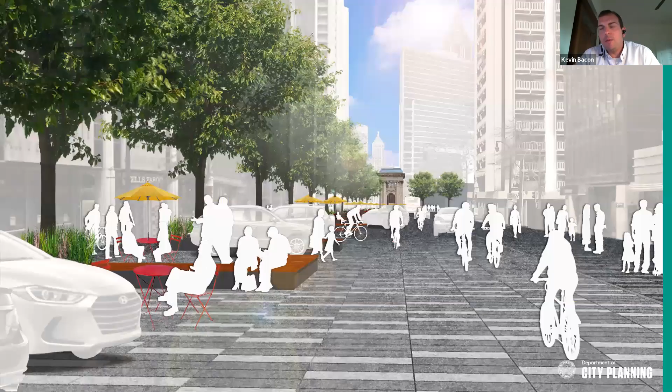Not just to single Peachtree out, but if we can get it right for Peachtree in terms of how we think about our public spaces, setting the tone for our public spaces throughout downtown and the rest of the city. So what you're seeing here is the culmination of the studio's work many years ago.

We first unveiled it at Atlanta Streets Alive in 2018, and had a couple of other different meetings and conversations to start sharing the idea. This really was just a 'what if.' We looked at the right of way of the street, and we looked at other cities that were doing interesting things.

Some of the things we heard, and still continue to hear, is that people think Peachtree Street should just be cut down or shut down to cars completely, that cars should not be in the space and it should be pedestrians and bicycles only. We hear that about a lot of our streets, and if you start to do that to all of our streets, we create a whole other situation of traffic challenges and public life challenges.

So one of the things we wanted to ask is: is there a better public space design that cars can inhabit, but where the balance, the majority of the space, is shifted toward how we accommodate and make space for people—bikes and pedestrians—but really that life you want to see on the street every day.

So we started looking at shared streets and shared spaces, looking at examples. We talked about Bell Street when we did our virtual tour in January. We've liked Exhibition Road in London a lot, and several others, and they're all just a little bit different. But the idea is that you remove the limitations between users and reinforce space and where things happen by the design of it, rather than striping and signage—again, carving out as much of that place for people. So it was a very informal start to the process, talking to developers, people on the street, and using that to paint a picture of what could be.

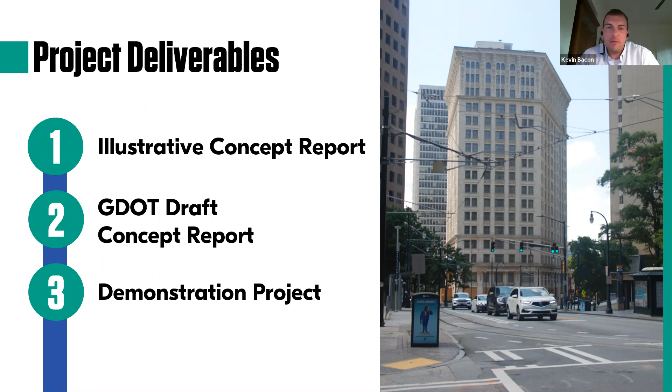We want to hear from people throughout that process. So we'll talk mostly tonight about what that demonstration project is.

This is really coming at the end of our scope of work with Toole. You can see we've been doing existing conditions analysis, looking at different designs, refinement of the street, and talking through those with a series of workshops, plus activation and programming. This demonstration project, even though it's the concluding point of this study, is really the beginning of what we do next in understanding whether these ideas embedded in the shared space really work.

As much as we'd like to keep Toole with us forever, and hopefully we can work with them again, this is really meant to push us to the next phase and start this demonstration project. So we're looking forward to getting that going.

This is a culmination of the engagement we've been doing over the last year, starting with open commenting on the website, different interviews and Zoom meetings, and thankfully now that opening restrictions are starting to ease, we're doing some of those in person again. We had a great time walking up and down Peachtree again last week, and businesses are either starting to open or getting ready to reopen, so owners and tenants are much easier to talk to or find.

That's a big reason we're moving this demonstration project all the way to the very end of this process. We wanted the daily activity of Peachtree to be as close as possible to the starting point when we got there. It won't be perfect or exactly what it was before the pandemic, and I don't think we'll go back exactly to life the way it was, but we wanted to make sure there were actually people experiencing this when we move forward with it.

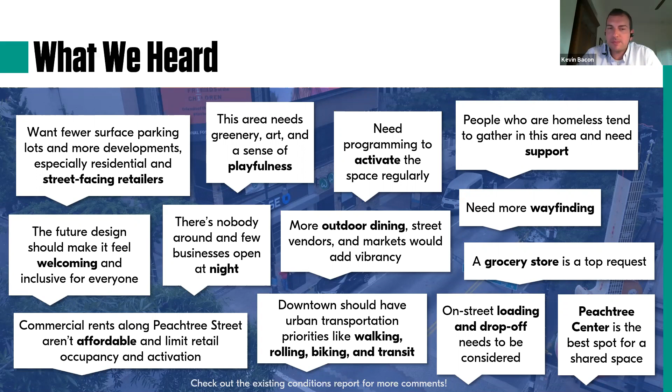There was a lot of nuance to what we're proposing, and it was great to talk to owners we hadn't been able to engage with so far, and hear their excitement about starting to reopen again, and that there's potential within what we're proposing for this first test of Peachtree Street for them to test their operations within it as well, and work with them to refine the design.

So I will say what you'll see tonight is the demonstration project as we were taking it to business and property owners last week, and having a lot of really great conversation.

The feedback and revisions to that design are happening right now in terms of spaces we need to carve out for them, so you won't necessarily see all of that tonight. We will share that as soon as we have the final version, but keep in mind this is something we'll probably be working on until the moment we put this in the ground, and even after it goes in, because this is a test and we want to make sure we're getting it right.

This will also be available soon on the website. You can see the different shared space concepts. Again, this is thinking years and years into the future of ultimately where we think we'd like Peachtree to go, and the reason we're doing this demonstration project is to test different elements of this.

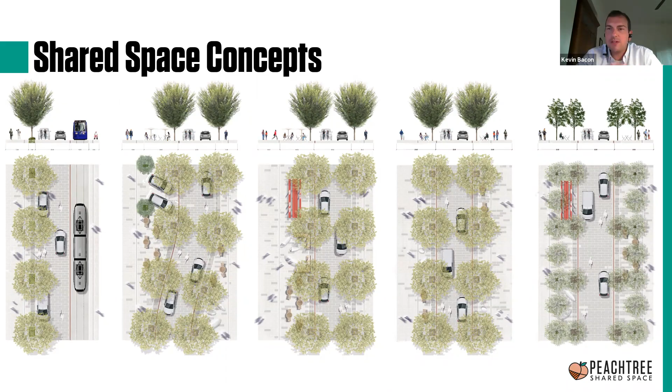The phasing strategy is the idea that the demonstration project is the starting point for continuing to refine our design. So what we're talking about for this demonstration project is 3 blocks.

One of the questions for the shared space project was, where does the shared space go? The studio had come to the conclusion that Peachtree Center and that general area was kind of the heart of downtown and made the most sense. We looked at the entire corridor and think there are other areas that could benefit too, but this is the one that seemed to resonate the most, and in terms of technical analysis seemed to fit.

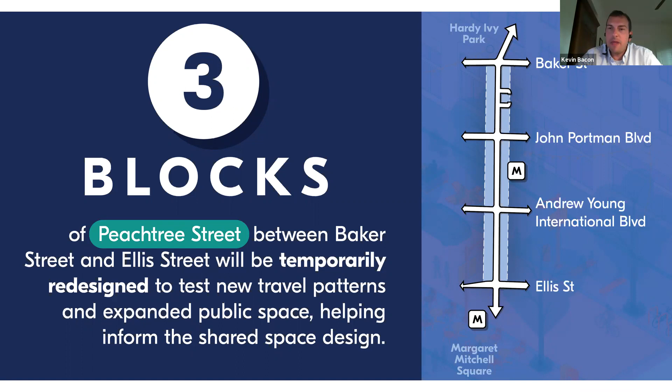So we're going to be demonstrating from Baker Street to Ellis Street, those 3 blocks. We'll go to the next one.

The point of this is to see what works and get community input along the way. It's not that if we haven't heard you through the last year, or up until this goes in the ground, that this is it and this is done. This is meant to be this first phase in a 90-day period, and we're even planning so that if in the immediate days and weeks after there are issues we need to solve for our businesses, we're prepared to do those as well, so that this is all adjustable and gets us to a better understanding of how the design works and getting to the final design.

So the first phase, which we'll be talking about most this evening, is an idea of a 90-day demonstration. The week of June 21st is when we'll be out there starting to install, deploy, and put into place the demonstration project. It will probably take about a week, and by Saturday, June 26th, these improvements will be in place.

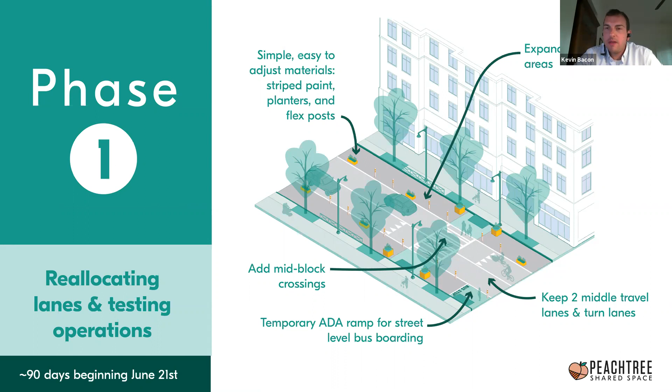Really what we're talking about is just simple changes to the street. We'll get into the configuration here in a minute, but temporary striping, planters -- we'll have pictures of those -- help us hold the edge, wheel stops, flex posts. At the same time, we want it to look really fantastic. We also want to make sure that in this first phase, the things we put into place are easily adjustable, so if we need to make adjustments to make sure it works for everybody during the 90-day period, we're able to do so.

And this is all part of the project budget. In phase 2, after we've had a chance to really understand how the space works, we'll be working with Central Atlanta Progress to do more interim improvements -- more painting in the areas of the lanes we would propose taking back, other street furniture elements, additional planters, potentially murals in the space -- to really start to make it feel like home, something we think of testing for at least a year, possibly longer.

We want to see how it goes. Part of a demonstration project is, it may not work.

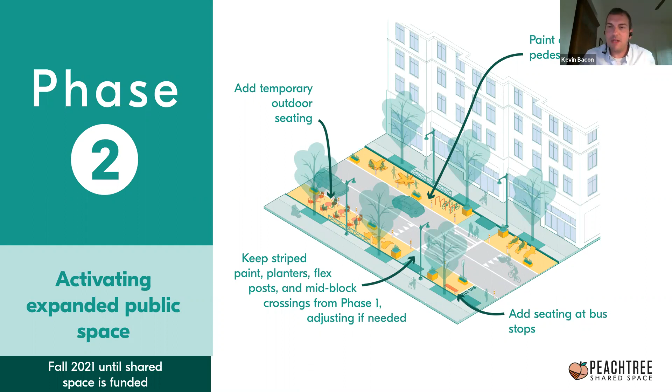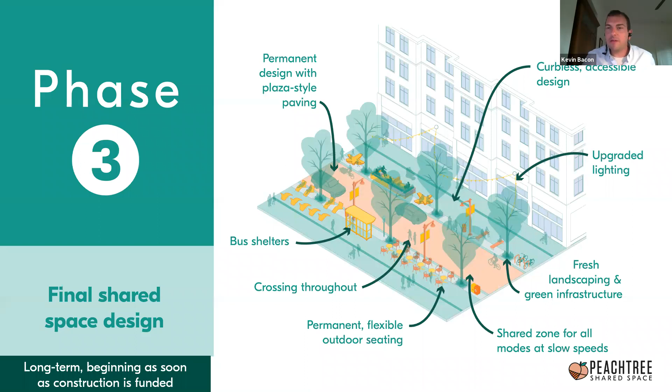We may decide objectively that this isn't the right answer for Peachtree Street. It goes away, and it's important that the materials we're using can be removed and used in projects elsewhere. With each phase, we're testing different things that get us closer to what you see in phase 3, which is the shared space design with permanent material changes and other fixtures we'd see out on Peachtree for the long term.

So understanding that this is how we're proposing to ease ourselves into testing out Peachtree Street, I will turn it to Addie, who is going to take us through the drawings we've been sharing for the last several weeks, and were out in the field with last week, to talk about what specifically we're doing to Peachtree Street.

Again, my name is Addie Weber. I'm with Toole Design Group, the lead consultant on this effort. As Kevin mentioned, unfortunately Tony Garcia is sick today and won't be able to join this call, so I am replacing Tony. Tony is a principal of Street Plans, and they collaborate with communities across North America on these types of projects. So I'm going to be doing my best Tony Garcia impression — not quite sure what that is yet, but bear with me as we go through this.

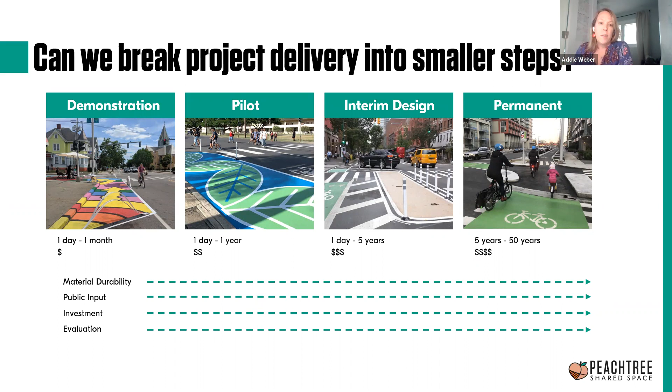One of Tony's favorite sayings is to test before you invest, and that is exactly what the City of Atlanta is doing with this project. Originally, the city had looked at this as a demonstration project of 1 or 2 days. But as we moved through this process, it became clear that this should really expand from that 1 day, 1 month test period to something more robust, as Kevin mentioned.

Unfortunately, we can't test a true shared space, which would mean rebuilding the street, as Kevin mentioned, as a curbless street. But there are two aspects that we can really test, and the first is lane reduction.

I hope most folks, and I've seen a number of people who have joined us before, had the opportunity to at least review the existing conditions report. I'll let you know that this portion of Peachtree Street has some of the lowest vehicle volumes between Midtown and Buckhead. It also has an extraordinary number of sideswipe crashes caused by folks stopping in the outer lanes and then swerving to avoid those — those are about 33% of the crashes, the highest crash type we have along the corridor.

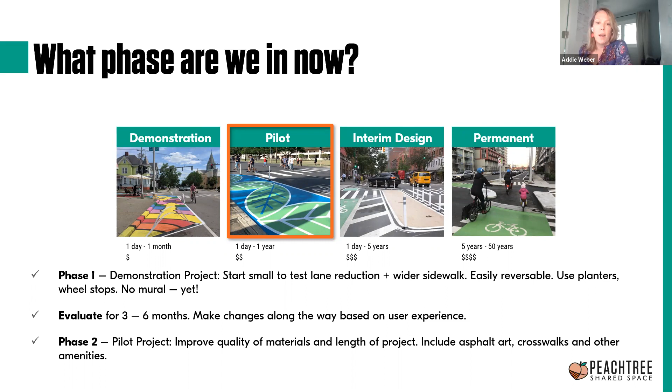So we can test what happens when you reallocate those outer lanes to expand the sidewalk and provide dedicated areas for loading and unloading. That's the exact second thing we'll be testing, which is the wider sidewalks.

So we will evaluate how this is working just like anything else in phase 2. For those of you who joined us back in January, when Tony gave this original presentation, we went through a variety of designs and design considerations.

The one I'm presenting to you tonight, while still in draft form — we had a great corridor walk last week and stopped and watched some very close sideswipes, some almost rear-ends, some pedestrians playing games of Frogger through the corridor. So we took that kind of data, as the city's kind of coming back to life again, and applied it to these concepts. So what you're seeing tonight is from last week, and we're still refining moving forward.

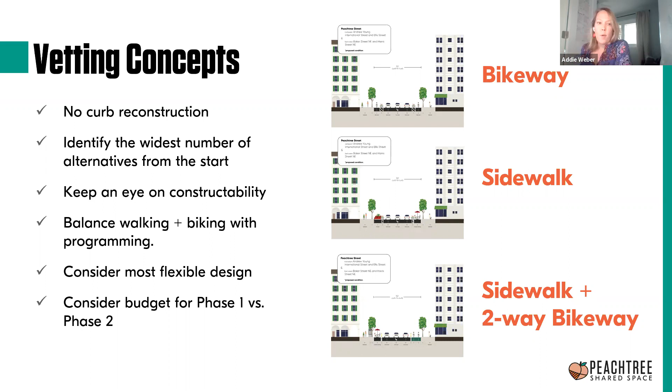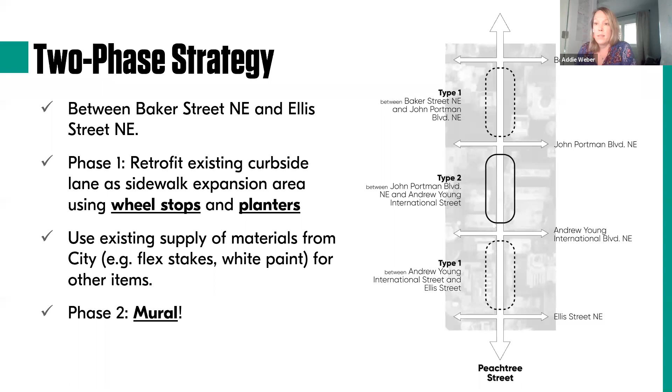The demonstration project will focus on 3 blocks between Baker Street and Ellis, with Peachtree Center being the center of this. This first phase will only be using wheel stops, planters, and traffic tape. We started by considering just going big with a mural, but we wanted to make sure we got it right before doing any kind of painting on the ground. This will allow us to adjust as needed, particularly as it relates to loading and unloading areas along each block of Peachtree.

For those who have joined us in January or have been to our website, this is a project image that you see on the right of downtown Miami. This is something similar to what we were testing tonight. It's improved and increased space for walking, a space for outdoor dining, and improved bicycle access. Anybody can use this space once it's finished at the end of our demonstration effort, with a reduction in the number of travel lanes and increasing the overall total space and vibrancy to this space.

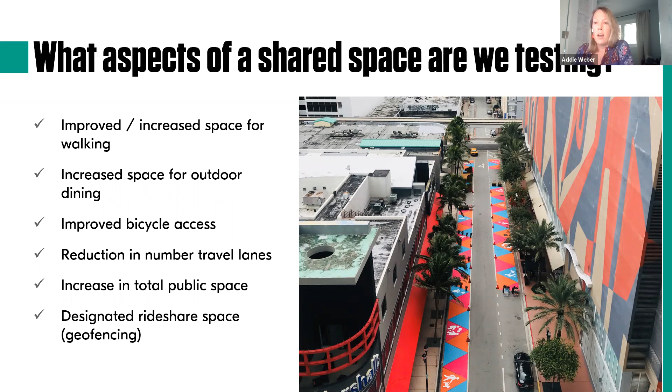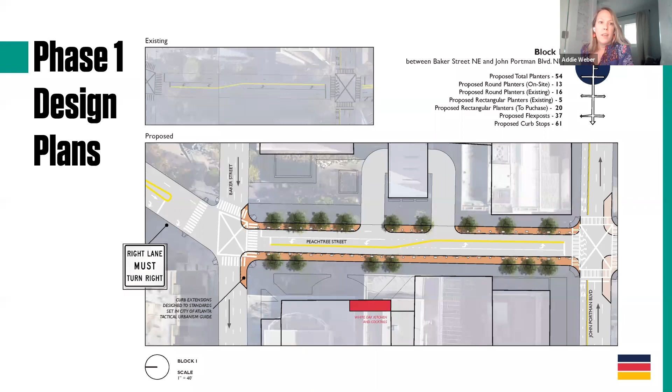Between John Portman and Andrew Young, we'll continue to expand the sidewalk, but allow for bus loading and unloading and the existing valet area. We sat back several times and watched the valet that was happening along there, along with the bus loading and unloading. For note, bus loading will happen at street level, and we will have temporary curb ramps at mid-block to allow users coming off the bus to access the sidewalk.

I think the biggest change, and one of the most exciting changes we hope people see, is the mid-block crossing and the removal of the fences along the edge of the sidewalk. This will do a lot for helping, since we watch people crossing there anyway, and kind of dedicating that space to folks.

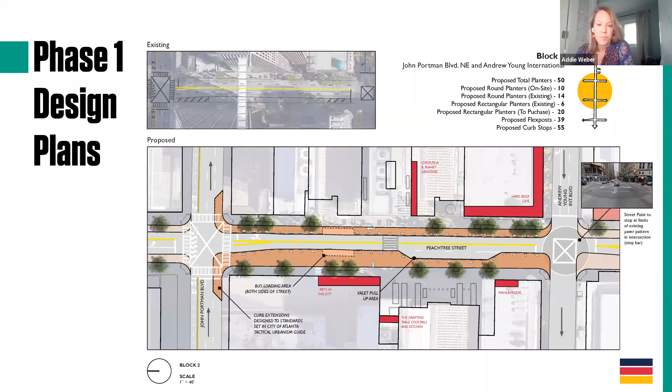Between Andrew Young and Ellis, we will continue with the same treatment. What you don't see here is we had a great meeting last week with 200 Peachtree and the restaurateurs to discuss consolidating their valet requests. They each had some kind of valet in the works - the views, Meehan's, and the juke joint - and 200 gathered them all together and said, we'll put the valet in front of our area and really give them the space to activate in front of the restaurants. We think that's a great example of sharing Peachtree and what it could really be about.

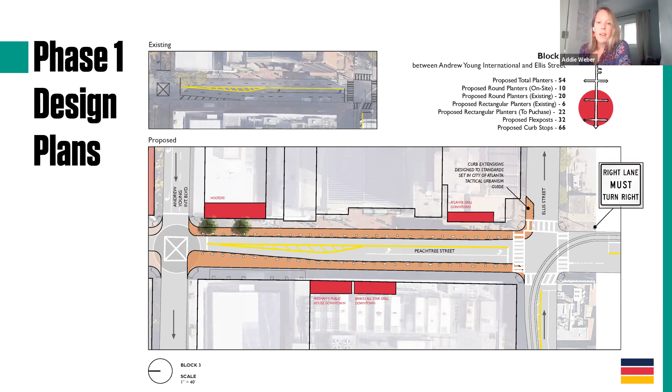As mentioned, we are pulling from a variety of materials. ADID is a huge supporter of this, and we are working closely with them to use what we have and add a bit more to make this work. That includes, from the top, the wheel stops, and moving left to right: new planters, traffic paint, spray paint, existing flex stakes, and existing planters, all coming together along Peachtree Street.

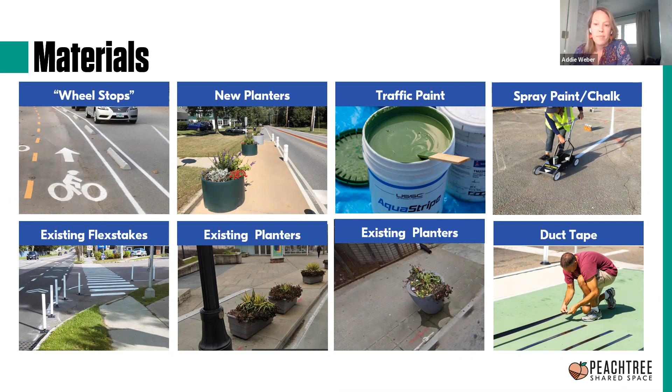Just a little more detail on this - the typical condition, we were looking at bulb-outs at the intersections to help set up the shared space where we'll have, in general, one vehicle lane in each direction. The red is proposed planters, both on-site and existing, and the yellow is the existing planters that will be there along with flex posts.

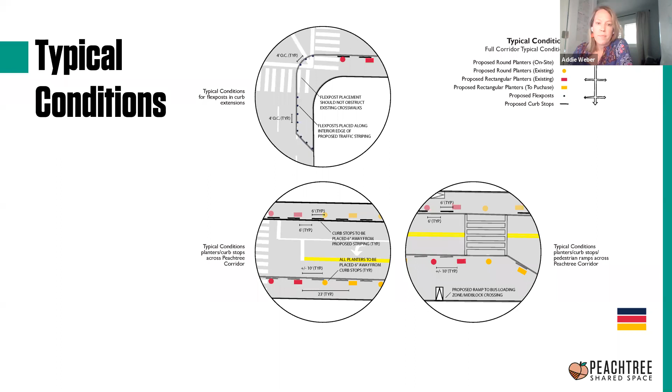The city has done a truly remarkable job getting a lot of these tactical urbanism elements out there. Maybe some of you have seen this, but this is similar to what we are thinking about - a very different context, but with wheel stops, striping, planters and flex posts all working together to provide that buffer and expanded pedestrian realm along the corridor.

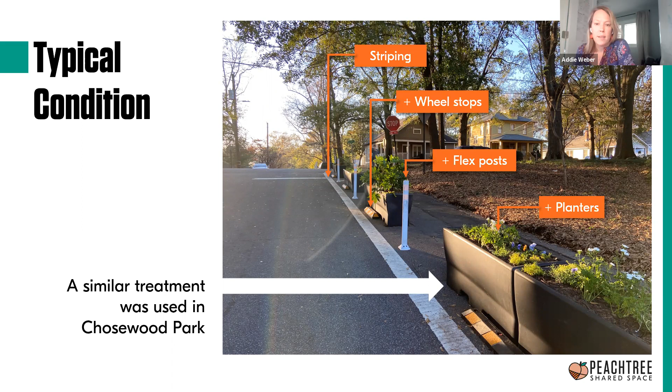Again, we are utilizing what the city has, not only what they have to date, but also pulling from the guidebook and using that for other projects along this corridor. I think it's a great example of how they have set this up, and Peachtree Street is a great test of this tactical urbanism on a big scale on your main street.

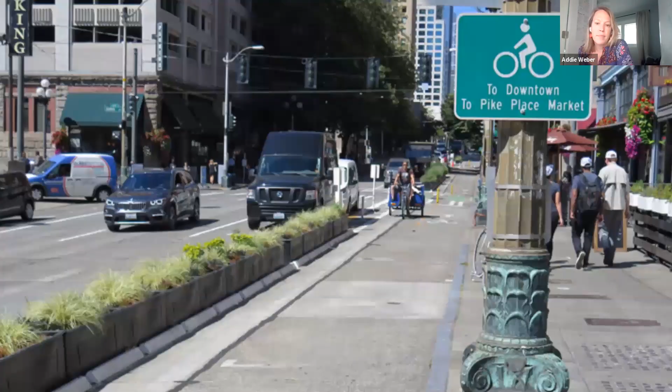And just some examples of where this has been done before - this is in Seattle, and you can see the wheel stops to your left and the planters along there to expand the bike facility.

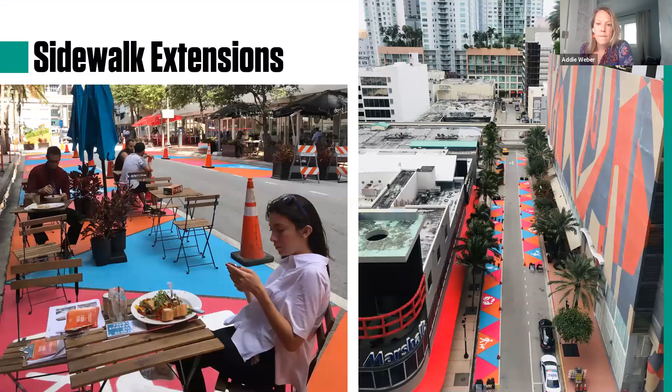This again is down in Miami. Tony had shown this earlier, and this was just a simple mural on either side of the street, reclaiming that space for pedestrians and activities. This is most similar to what we're thinking along Peachtree Street in the long-term phase 2.

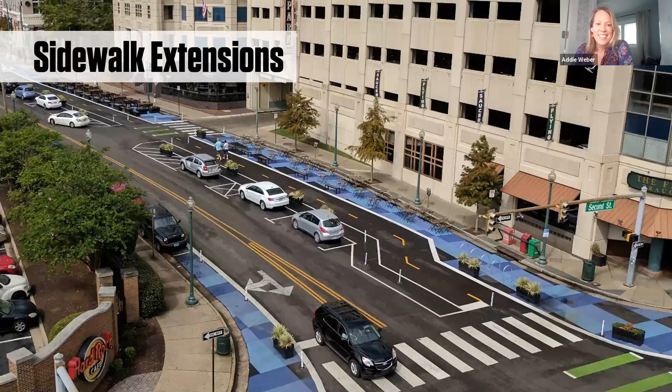Something really simple of just using a blue paint along the sidewalk edge to carve out space for really any user. In this case, it's a real flex space similar to Peachtree Street. So those can be folks walking their dog, folks in wheelchairs, folks riding a bike, any kind of use outside of the vehicle use, that's kind of what that flex space is for.

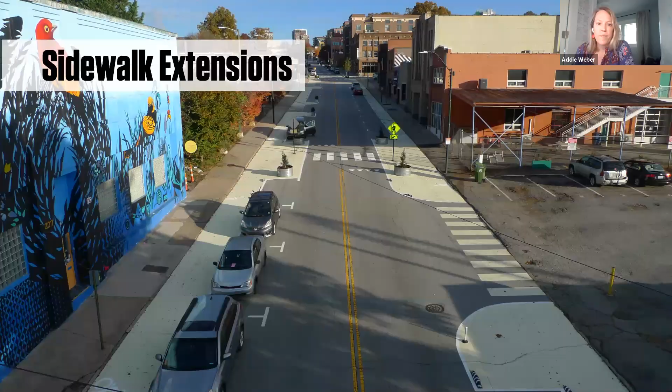So later this week, we will have a survey, and hopefully all of you have signed up for the mailing list, and you'll be getting a notification of when that comes out. We'll be having a survey and collecting some data on that.

We're going to be looking at not only from you guys, but also collecting what the pedestrian counts are today, given that it's COVID, but wanting to look at kind of the before and afters of the corridor and what we can really test and see how it's working and what's not working.

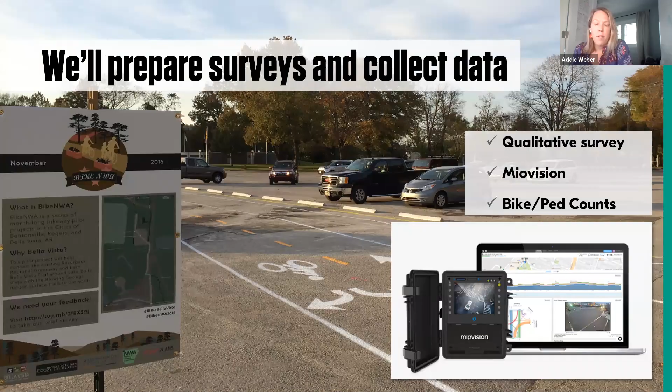We will continue to meet with people. I know last week, Tony and Monique went out for two days and met with almost every fronting business along Peachtree Street to discuss the project, drop off a flyer, answer any questions. This is what's happening right in the demonstration area.

So this is something that probably will need a couple additional meetings as it builds up to the day and people get more excited and have more questions too. That's what this is really testing. So the questions will be there and we'll be out there to help.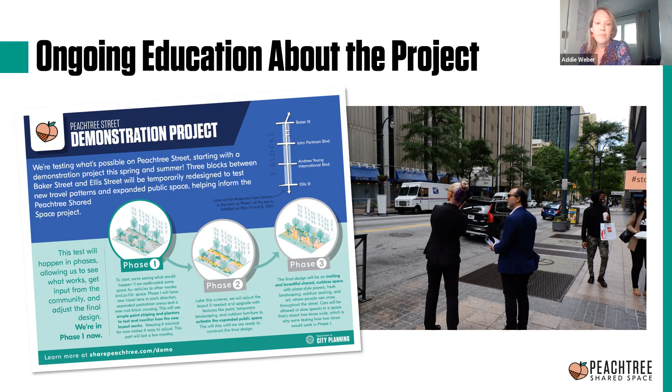And then of course we're going to document this project, and it's everything from photography to those counts I talked about in a couple slides previously, but also listening from the users, what's going well, what's not going well.

As Kevin mentioned, it's going to be implemented, but give it a couple weeks to let it shake out and let us know what's working, what's not working. This is interesting - this is what this area is being used for, this is what was happening here. It's really an opportunity to test the things that we can test for shared space over the course of 90 days.

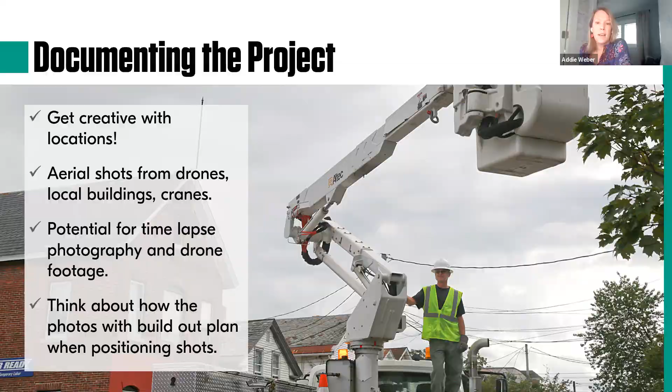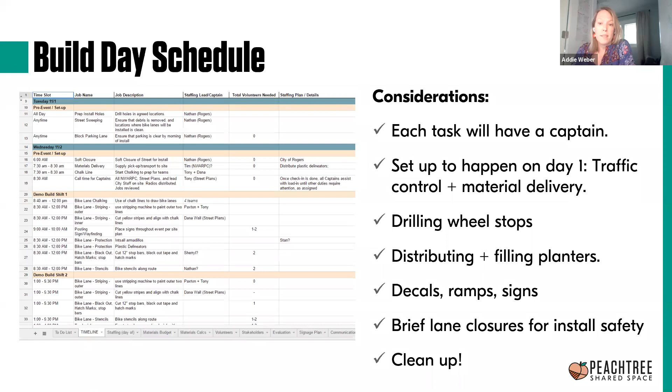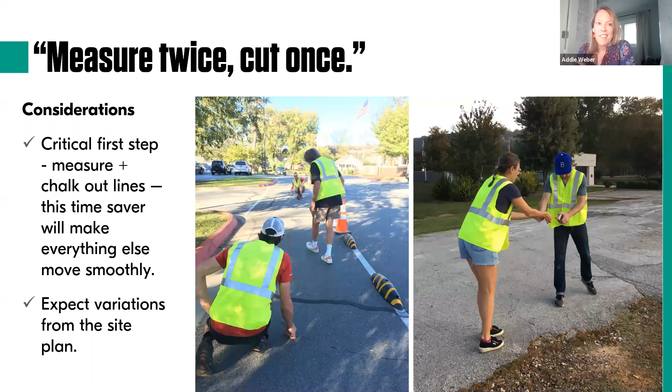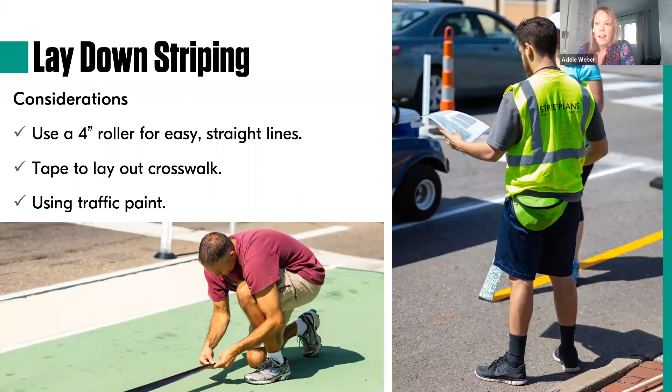These are just some slides of how it all comes together - in this case, volunteers laying out the materials and pulling together the materials, getting folks to measure, chalk out lines. Tony is great at guiding communities and cities through this process with great results. We're super excited to be working with the group on getting this up to speed. And then there's the considerations, some of this is on the site, what's going to happen and responding to that as we move through it.

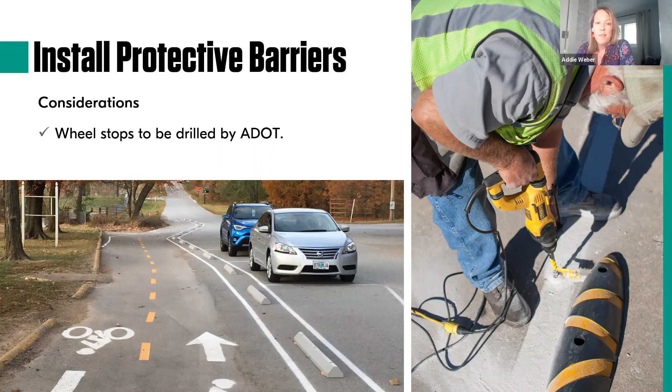These are just some more examples. Obviously, our partners at ADOT will be involved, CAP, ADID, MARTA hopefully will be able to engage as this moves forward, along with the Atlanta Regional Commission. We've had some great partners and great working relationships, and we're really excited that everybody's come together.

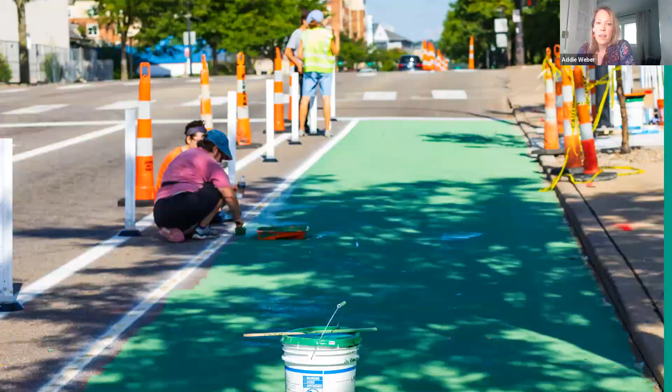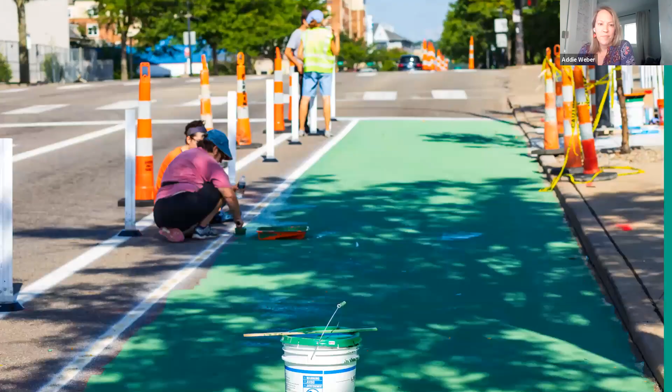This is one activity we're still trying to flush out: stencils. While we're not ready to paint yet, we are looking at doing some stencils along the corridor to highlight what the space could be used for—walking your dog, walking, riding, anything of that nature. And then the fun part of painting comes in phase 2.

Hopefully when it's all said and done, we can celebrate. Right now we are still under the city's COVID-19 restrictions, but that doesn't mean come June 26th you can't start utilizing the space. We really hope you get out there and use the space, test it out, see what it can do. We're really excited about this opportunity to test the shared space.

So save the date: June 21st through 25th is when our team will be out there working. So you'll see us out there. Hopefully it won't be raining and hopefully it won't be too hot. But as I mentioned, launch day is June 26th.

Again, event planning would be pending COVID conditions, but if you are interested in volunteering for this, please let us know by our email address, peachtree@atlantanga.gov. If we can allow some folks to come help with the build day, we would really love that to happen.

Some key takeaways—this is great because Tony's picture is in the background there. We're starting simple, starting with the curb stop and planters for phase 1 and traffic tape. Flexible, able to respond to reactions and what's happening on the ground as we move through. But we will begin thinking about phase 2 immediately, the painting. What happens with that mid-block crossing? Can we make that super exciting? What happens with the activation? And as this moves forward towards implementation, it would be great to let the word out that this is coming and get folks excited about a fresh restart to Peachtree Street and downtown.

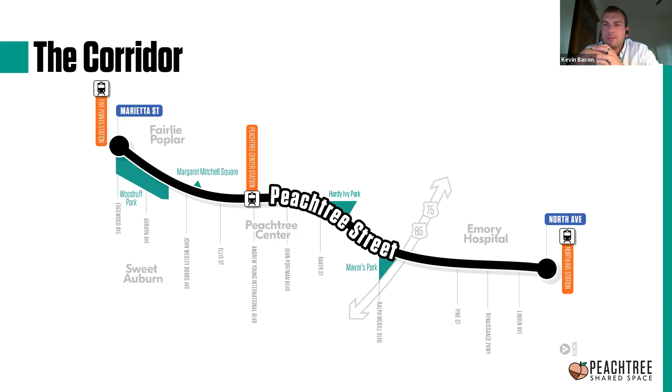Great. And then Addie, would you like to speak to how bikes will be accommodated? We've gotten a number of requests for dedicated bike lanes, and just better understanding how they'll safely move with vehicles.

Well, the good thing about the bike lanes today is that there's bike lanes on a parallel street. I think we definitely want bikes to use Peachtree Street, and they can use that expanded pedestrian area in the midterm. But eventually we want the speeds along Peachtree Street to have them moving through on the vehicular lanes, as that expanded pedestrian area has more outdoor dining and becomes a lot more vibrant, and get the scooters off the sidewalk as well, into the street.

One other note in the chat: deliveries will be directed as much as possible to use side streets, which will help minimize the number of conflicts there.

I'll quickly answer one final question we've gotten: if this presentation will be available online, and the answer is yes. The project website that you visited to register for this event, sharepeachtree.com — if you look on the Engage page there, that's where we've been posting all the project recordings. You'll be able to access this within the next day or two.

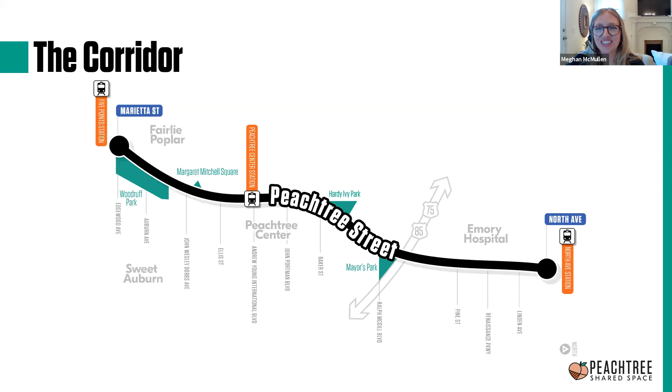But Addie, would you like to wrap us up? I'll actually see if Kevin wants to wrap us up, but thank you so much for being with us this evening. We really appreciate your insight and feedback. I'm really excited about this project. We're really excited to get the real-time feedback as it comes in, and test what the future of Atlanta could be.

Kevin? Yeah, I think just two closing items. One, I don't know if we had any of our business owners or anybody living along the stretch — we've been trying our best to reach out and connect with anybody. But if there's anybody on the line tonight, or you know of somebody who feels like they haven't been heard appropriately, please reach out to us with our contact information, and we're going to continue having those conversations all the way up to the installation and beyond.

So we're continuing that work, and just to hit home the point that this is a demonstration project. When this opens up on June 26th, there will be pieces still to work out and get right, but as we've seen demonstration projects done in other cities, you've got to give it the time and patience to allow us to collect the data, make observations, talk, and really get used to it, and then objectively decide if this is something we continue with, or something that genuinely was not the right solution for the space, and not just be reactionary about it.